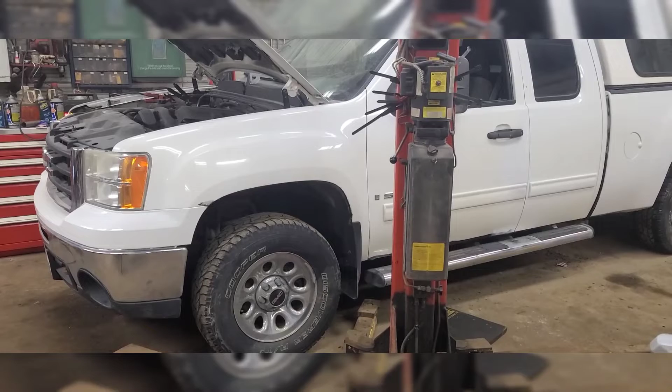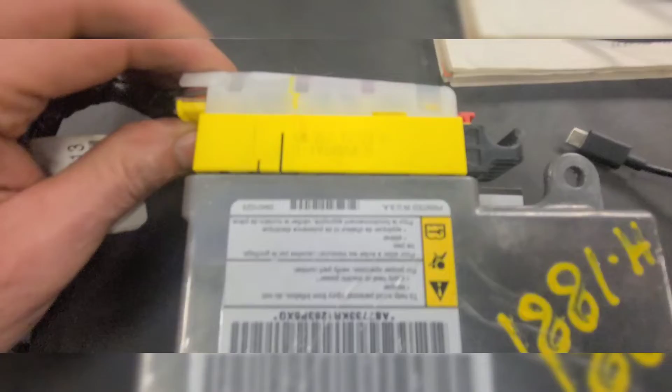Well, good day viewers. Today we're going to try to replace this airbag control module in this 09 GMC Sierra. We've purchased a previously enjoyed one from the salvage yard, and I've got the pigtail connector from it so that I can depin one of the terminals and replace one of the wires, pin 31 I think it was.

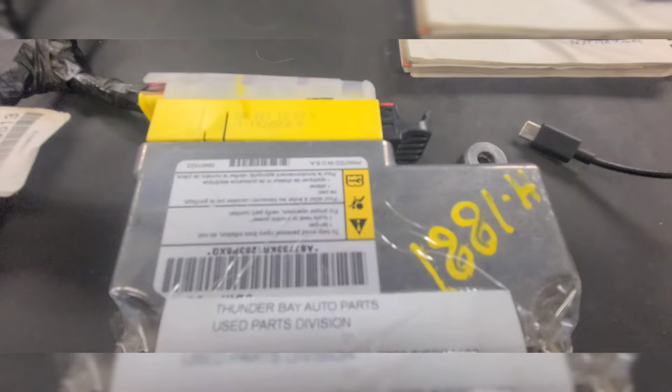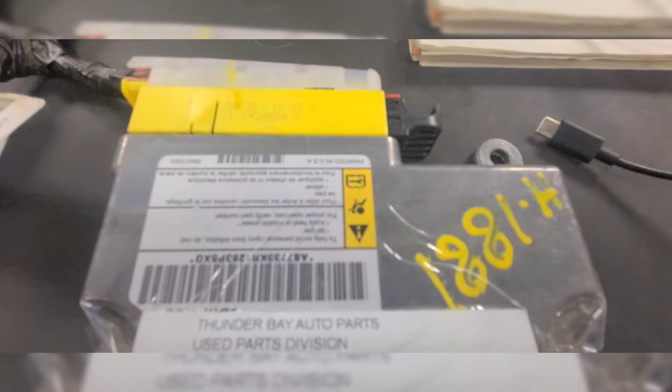But the interesting thing is the customer mentioned that he had a recall done on the airbag for the passenger side, one of the Takata airbags itself was replaced under warranty. So I thought I'd check for any TSBs and recalls on this thing, and I did find one. Let's have a look. So in the service information there are 3 recalls, and interesting, the most recent one that they just did is not listed here.

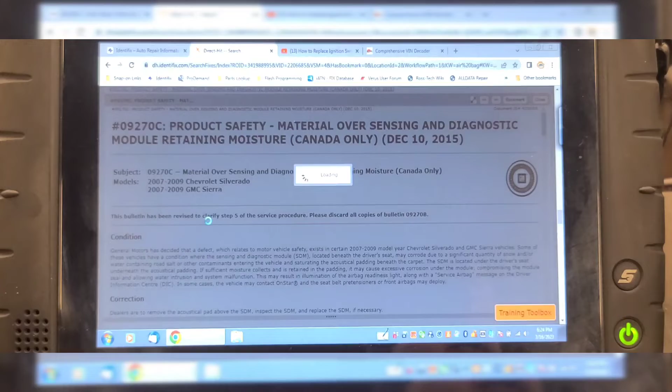But there's a product safety material over sensing and diagnostic module retaining moisture, and it says Canada only, and then there's a US version as well, but only certain states. Let's look at the Canada only one. GM has decided the defect relates to motor vehicle safety exists in 07 to 09 model year Chevrolet Silverado and GMC Sierra vehicles. Some of the vehicles have a condition where the sensing and diagnostic module, that's the airbag module,

located beneath the driver's seat, may corrode due to a significant quantity of snow and or water containing road salt or other contaminants entering the vehicle and saturating the acoustical padding beneath the carpet. The SDM is located under the driver's seat underneath the acoustical padding. If sufficient moisture collects and is retained in the padding, it may cause excessive corrosion under the module, compromising the module seal and allowing water intrusion and system malfunction.

This may result in illumination of the airbag readiness light, along with a service airbag message on the driver's information center. In some cases, the vehicle may contact OnStar and the seatbelt pretensioners or front airbags may deploy. So basically, this recall 09270-C describes the condition that this vehicle has been involved in, but I checked with the dealer today, and the recall was done back in 2009.

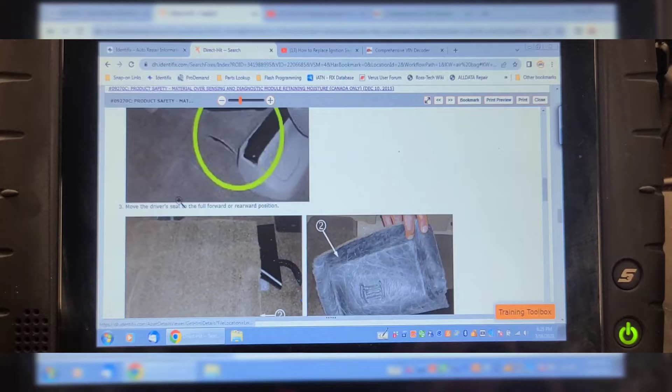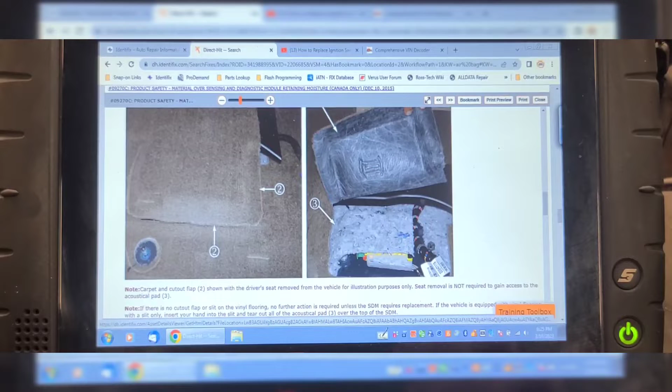And what the recall involves is to remove this sound deadening insulation padding. Just lift the carpet up and pull the padding out from around here. And then it says to inspect the airbag module for corrosion. And if there's corrosion, to replace the module. So it says if the sensing and diagnostic module replacement is not required, proceed to step 8. If it is required, proceed to step 6 and 7.

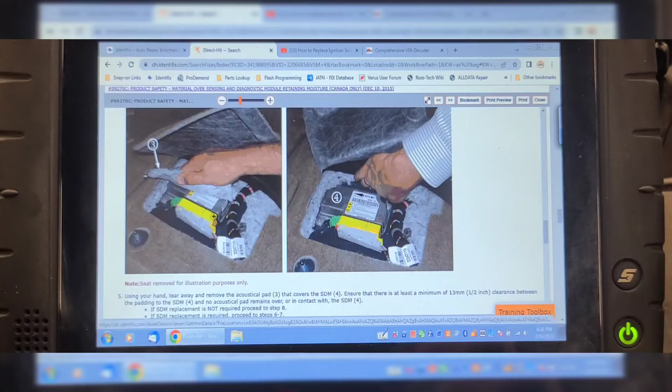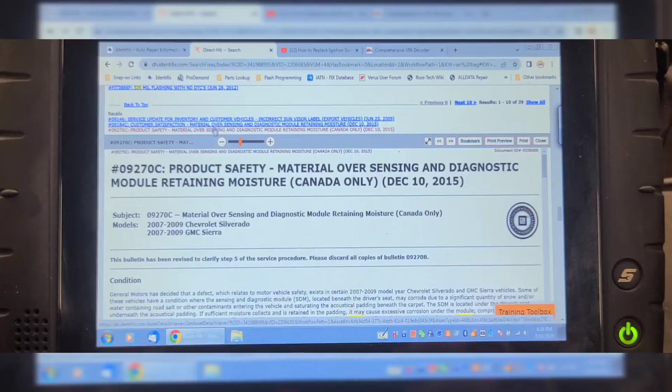Now, GM says once that recall has been performed, and it was done in 2009 according to the service records, they wash their hands of this problem. And that carpeting is missing in there. So that's the Canada version one. But there is another one here that might apply to vehicles in the US. It's basically the same recall.

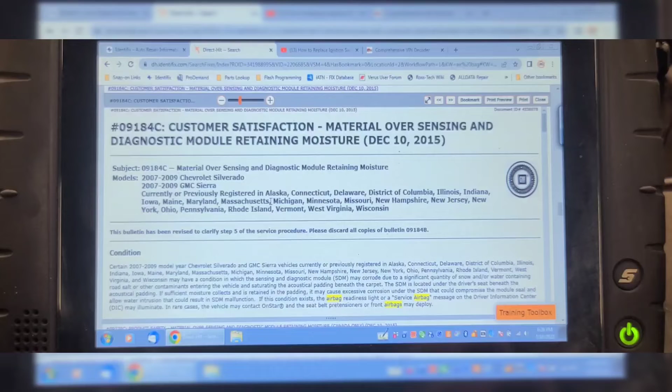It's a different number, 09184C, but it states it only applies to certain states, registered in Alaska, Connecticut, Delaware, District of Columbia, Illinois, Indiana, Iowa, Maine, Maryland, and so on. And basically it's the same thing. Lift the carpet, pull the trim out, pull the padding off, inspect the module for corrosion. If it's corroded, replace it.

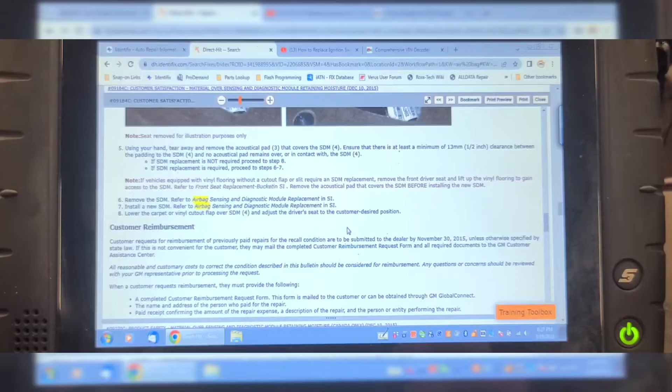But once that recall's been done, and chances are that the original owner got a notice, it would have been done in 2009 or 10. But if you managed to keep this thing long enough and not have that recall done, this customer would have got it fixed under warranty for free. But nevertheless, we're going to go ahead today and try and replace this module and reprogram it if needed. So here's the used airbag connector, and we need to depin this one wire.

So pry this little plastic cover off, it just snaps in there. Untape the harness, use a seam ripper if necessary to cut the tape. I like to use a seam ripper. Now this red plastic piece should just pry out of here, just like so. Pay attention to the orientation. There we go. Now the wire that we need, and you could use any one of them, but I'm going to use the same one that's compromised, is in this corner right here.

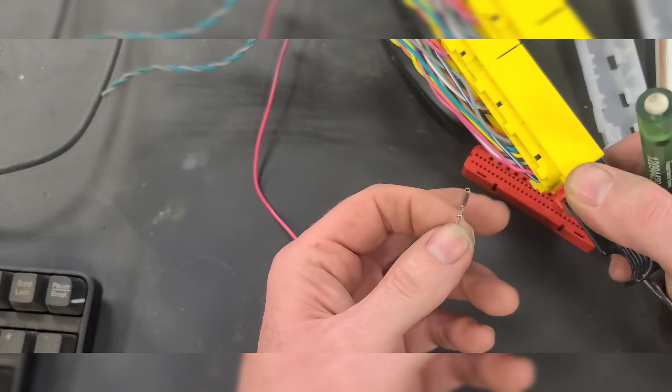And I'm going to use a small pick to try to release the terminal and pull it out. Just pull it right through like that. So now we're going to do the same thing to that module that's in the car. This is key switch power, I believe, or battery power. Usually red wires are hot at all times, so that's probably battery power. So we're going to do the same thing, and then we're going to splice the wire and solder and heat shrink it.

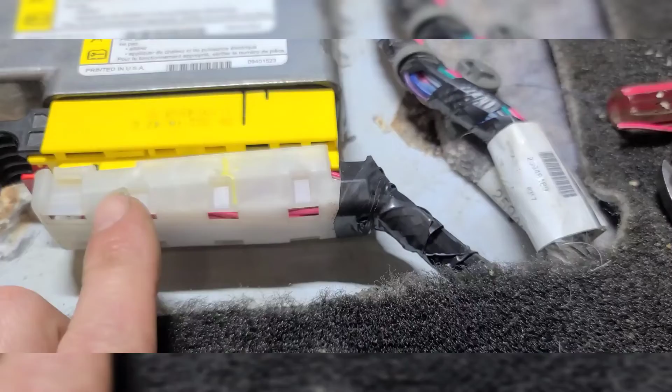So here's a look at the terminal on the existing wire. You can see that it's compromised, but there's another one right beside it, so I'm going to change 2 of them. So we're going to depin them and replace 2 of them. So there's the module reinstalled. I spliced those 2 wires and I put the splice inside here. This clip is broken on here, but it's not going to really hurt anything.

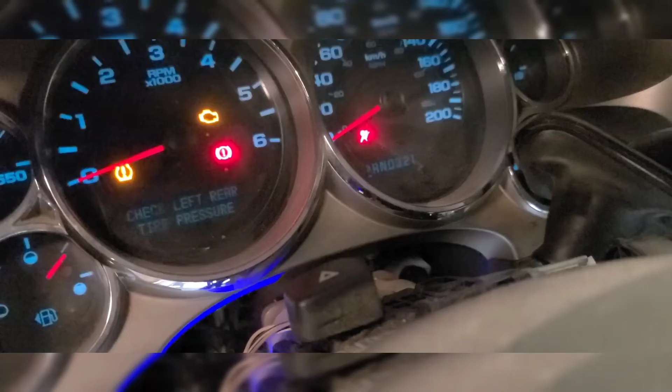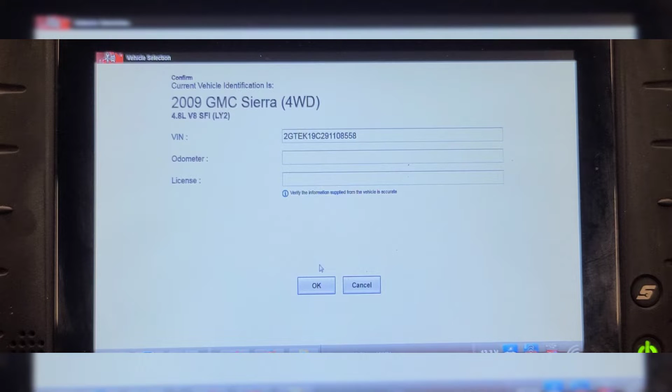The module is latched. I reconnected the battery. So now we're going to do a network scan and see if the module reports any fault codes. So the airbag warning light is on now. Change engine oil message. Service airbag. Let's see what code it's generating. So we've ID'd the vehicle again. Let's do a code scan. Pre-scan.

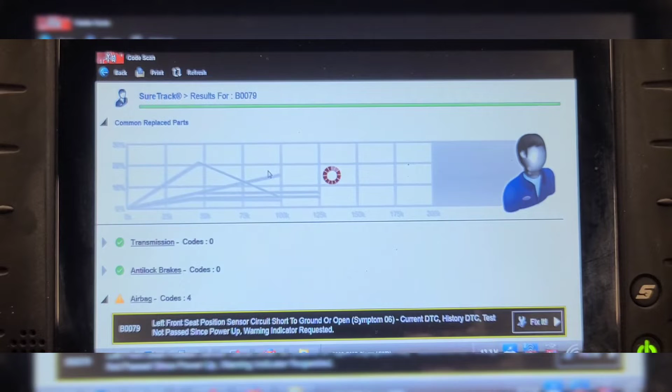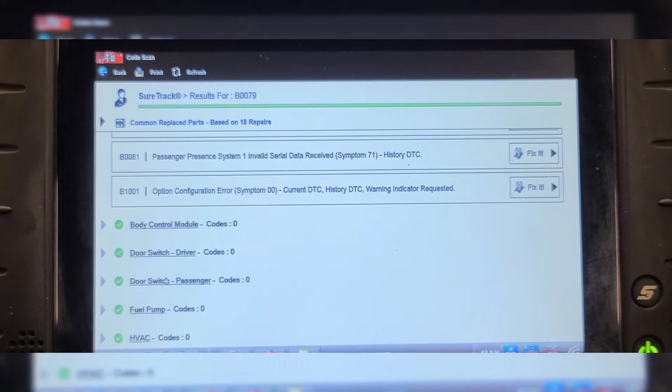Why is my... I got the seat out. Oh, that's the seat position sensor circuit open. I still have the seat out and electrically unplugged from the floor. Right front seat position set. That's right front. Passenger presence system. Of course, it could be tied in. Option configuration error could be because of the airbag module not being calibrated for this VIN. Passenger presence system plausibility failure.

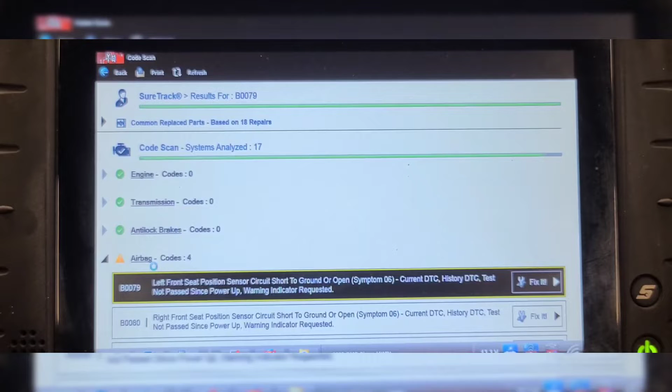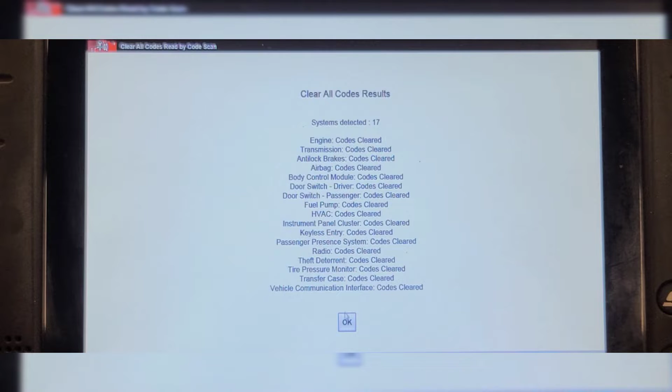Well, let's bolt the seat in and re-clear the codes. So I got the driver's seat bolted back in and reconnected, so that should get rid of the seat track error codes. 17 controllers instead of 6 that we had before. Let's do a code scan one more time and see if we still have the option configuration codes. I'm sure we will. Right front seat position circuit short to ground or open. And option configuration error.

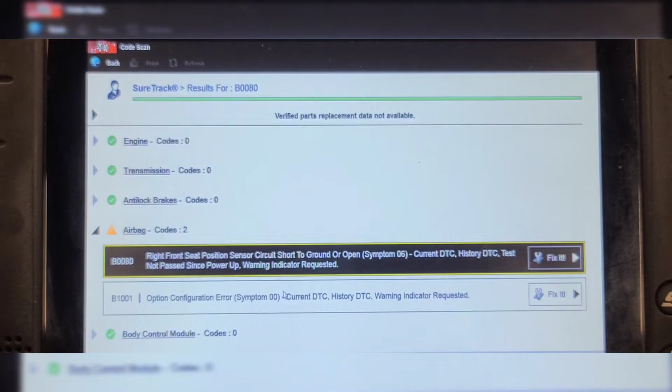Well, I never had the right front seat out. That's passenger side. Option configuration, unless that code is in the right front seat position sensor circuit short to ground. But this B1001 is because of the programming. Let's see if we fix the B1001 code by doing a handshake between the airbag module and the BCM.

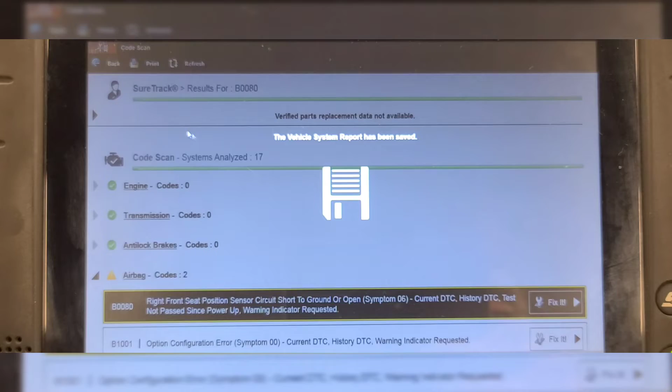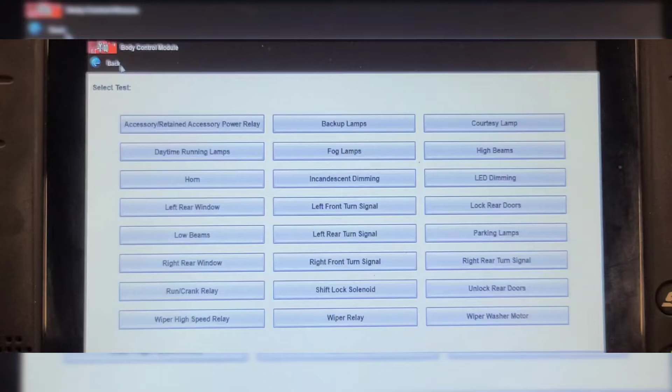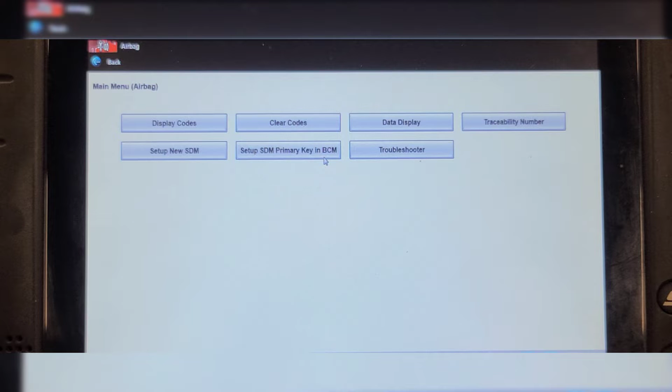Okay, body control module has no code, but let's go into the BCM and functional tests, and no, it's not in here. It used to be in the BCM functional test. Set up new SDM. Well, maybe it's in the airbag module. Set up new SDM. No, that's not what I wanted. Set up SDM primary key in BCM. Let's try that.

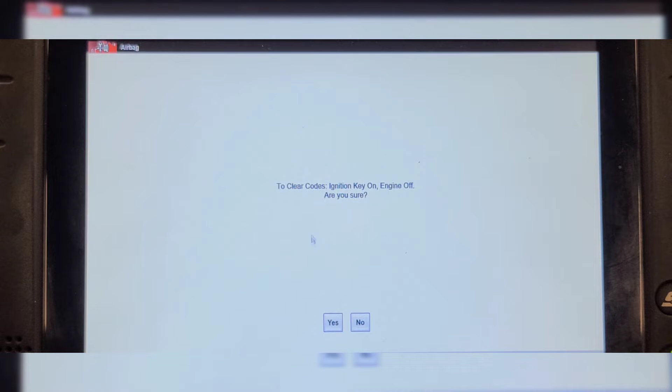Let's see what happens now. Worst case scenario is I got to connect to GM and download programming. Clear codes. Display codes. Current codes. Right front seat position sensor circuit short to ground or open. Well, that could have been there before.

And let's make sure we got no codes in the BCM. Body control module. Display codes. Current codes. No codes. Well, I'll have to talk with the customer to see if he wants me to diagnose the seat position sensor.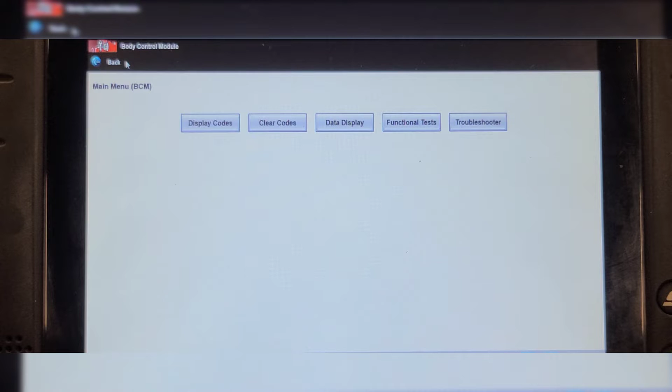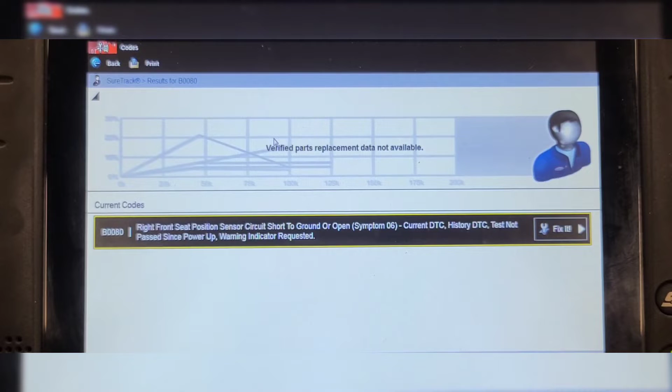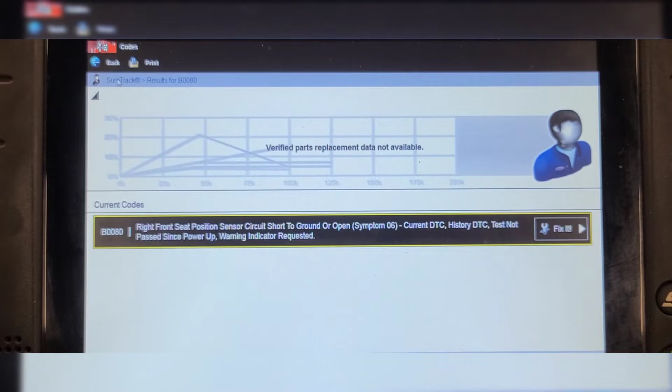Back in the airbag module. Display codes. Current codes. Right front, let's write this down. B0080. Right front seat position sensor circuit short to ground or open. Current DTC. Now that's a problem with the seat track sensor on the right side.

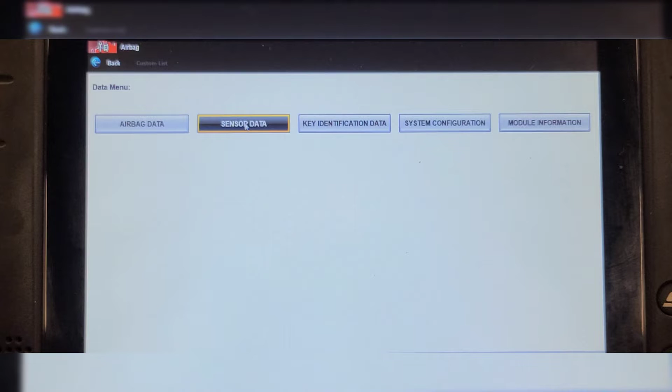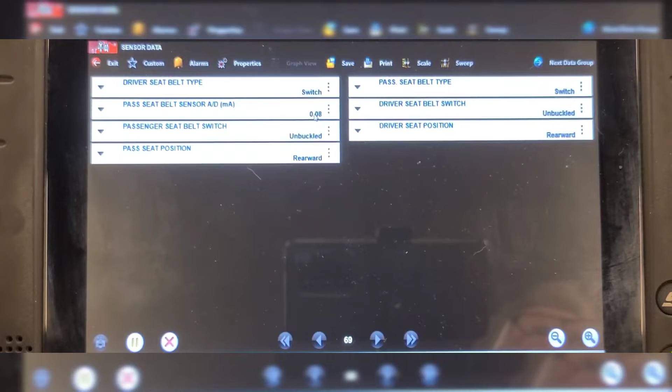Sensor data, system configuration. Driver seatbelt switch, passenger seatbelt type switch, driver seat position rearward, passenger seat position rearward. Passenger seatbelt sensor AD milliamps. That looks normal. How about airbag data? Everything looks normal. Well, I'm going to see if the warning light's still on.

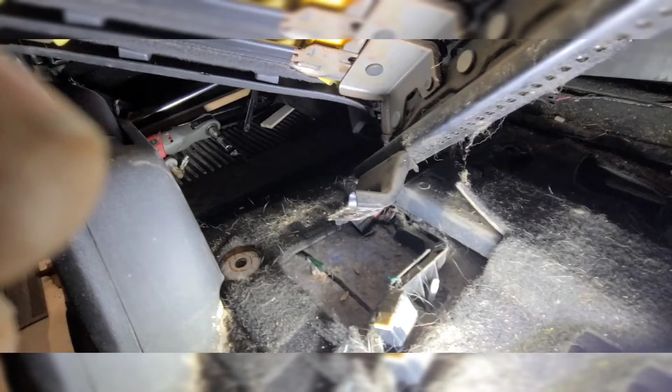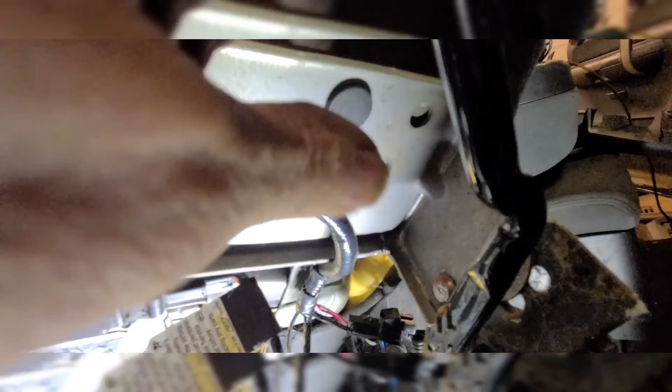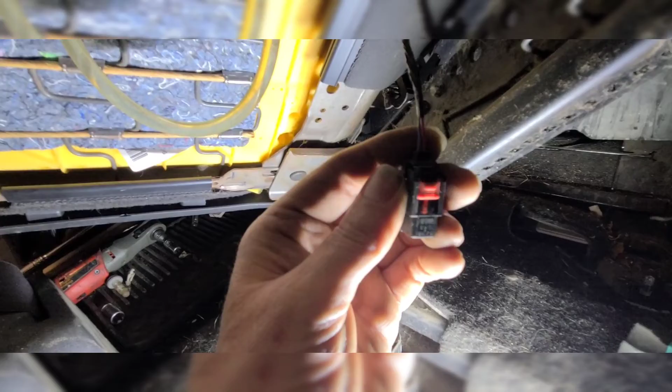So we're under the right front seat, and there's a connector hanging here, and I couldn't for the life of me see where it's supposed to go. It kind of looks important, but it's not. I don't see where it plugs in. Unless it's supposed to plug in up here someplace. But I can't see any seat track sensor, because that's what it was, a code for a seat track sensor. I'm going to look at the wiring diagram and see if these wires match the seat track sensor. But you would think that, I mean, it can't go very far.

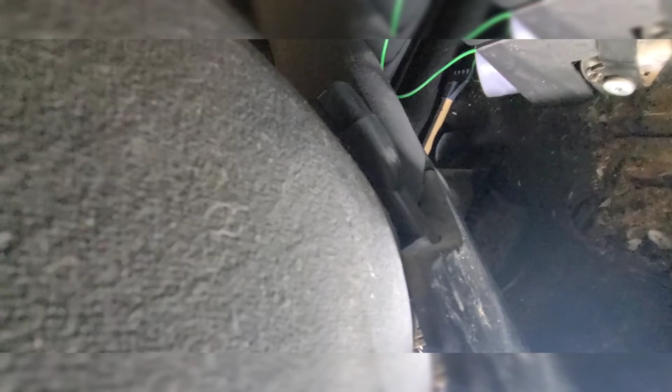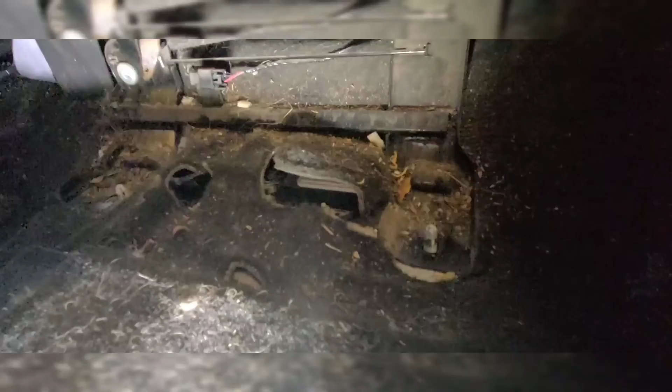There's a connector here and a wiring harness here. Everything appears to be plugged in. Oh, by the way, there's that other splice pack right there. 331 or whatever it was from the first video. All the green wires are network wires. So that one's accessible under the passenger seat. And I think that's a rollover sensor there.

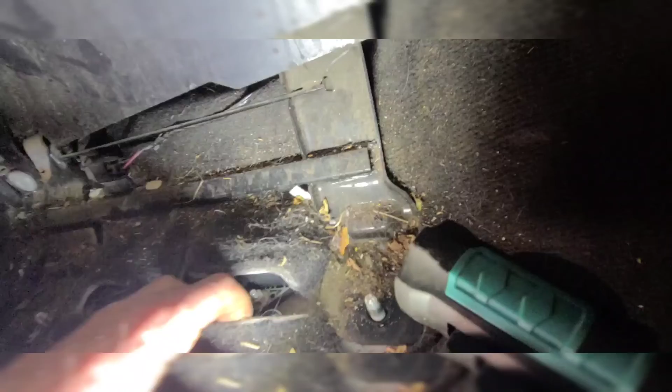See a ground under there. I don't see any place for that connector to plug in, and it would be sitting in this area here. That's a console. Oh well, I'm going to look up the schematic. So here's the troubleshooting steps or circuit description for that

B0080-06. Says the inflatable restraint seat position sensor is used to determine the proximity of a front driver or passenger seat position with respect to the frontal airbag. This seat position sensor interfaces with the sensing and diagnostic module. The state of the seat position sensor allows the SDM to disable stage 2 of the frontal airbag for the front seat that is forward of the forward-rearward position point in the seat track travel.

The SPS is a Hall effect sensor that is mounted on the inboard seat track of the driver and passenger seat. So that 2-wire connector would not be a Hall effect. A Hall effect is typically 3 wires. The seat track includes a metal bracket that shunts the SPS magnetic circuit, creating 2 states of seat position. So if the seat is rear or forward, the shunted state represents a rearward position. The non-shunted state represents a forward position.

The seat position sensor provides 2 current ranges, one range for shunted state and second range for non-shunted state. These 2 states are inputs to the SDM. State 1 shunted being the rearward threshold and state 2 non-shunted being the forward threshold. When the SDM receives input from the SPS, okay, so that 2-wire connector could be for something else that the vehicle doesn't have. Let's look at the schematics and see, passenger presence system 1 of 2.

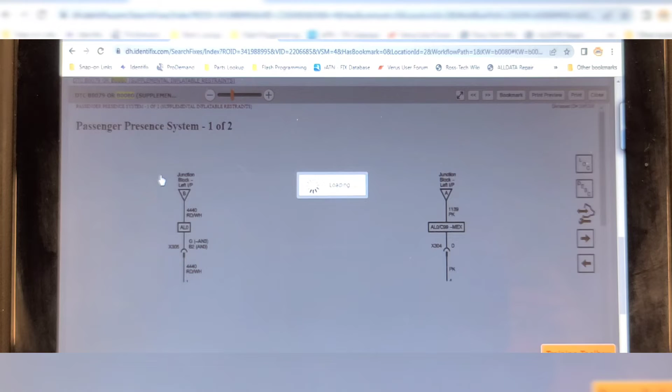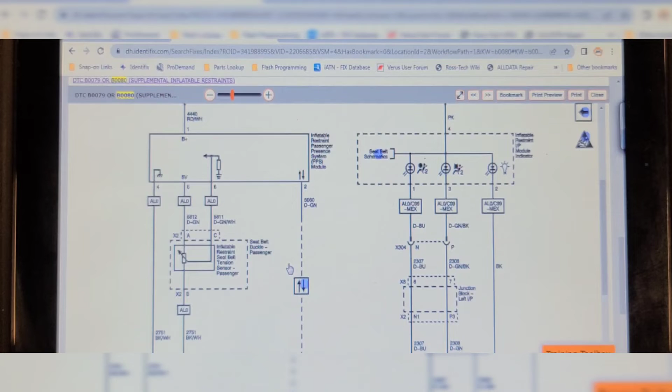Passenger presence system. Inflatable restraint seat belt tension sensor, seat belt tension sensor. That's not what we're talking about. That's seatbelt buckle, passenger side. So that's not it. Okay, where's the next diagram?

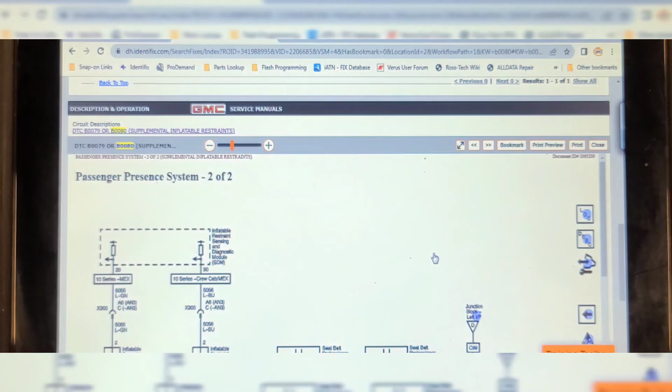Alright, inflatable restraint, seat position, passenger. So there is 3 wires. No, wait a second. Inflatable restraint, seat position sensor, passenger. Light blue and pink. 10 series crew cab, Mexico. 10 series Mexico. Driver's has got light green and pink, and passenger is light blue and pink.

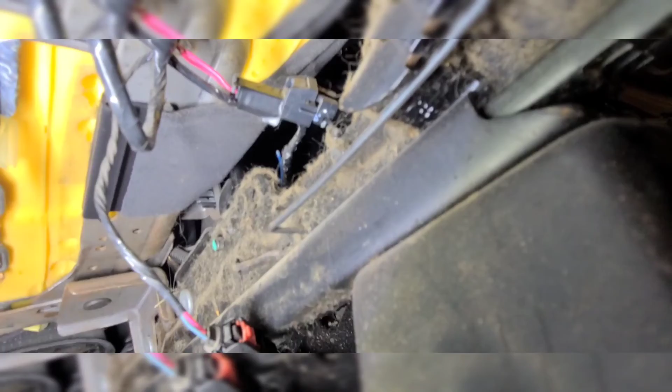So I'm going to look at that sensor. Well, that's definitely light blue and pink. And it's a 2-wire connector, so where the hell does it plug in? It's got to plug into the seat track somewhere. I'm going to take this seat out a little further and see if I can find it. It's got to be in this general vicinity because the wire is only so long, it can't go anywhere. Wow. How could this be so difficult?

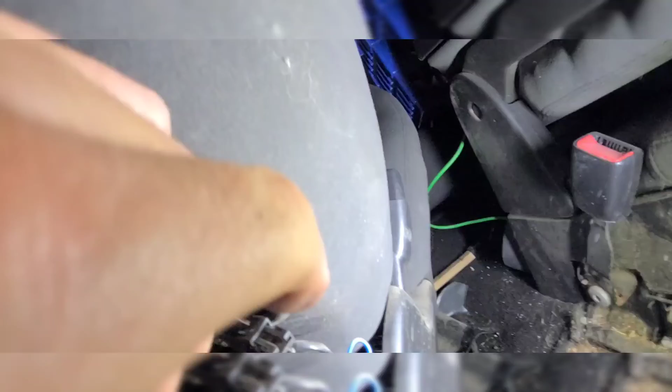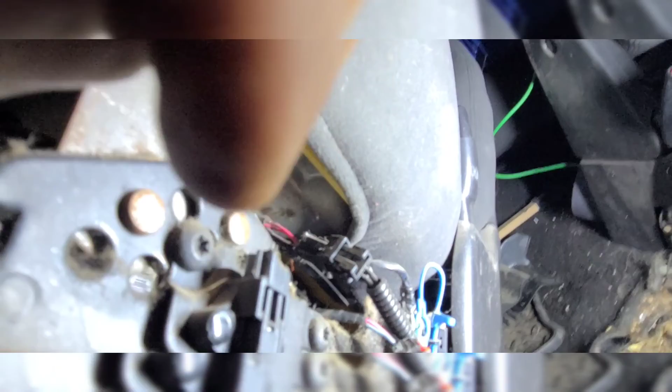Well, mystery solved. There it is there. So that wire comes through here and plugs into that connector right there, which is busted off. I wonder if we can get it still connected temporarily. But that's the seat position sensor. It's probably serviced with changing the seat track. I'm going to see if I can plug it in. So that sensor is broken.

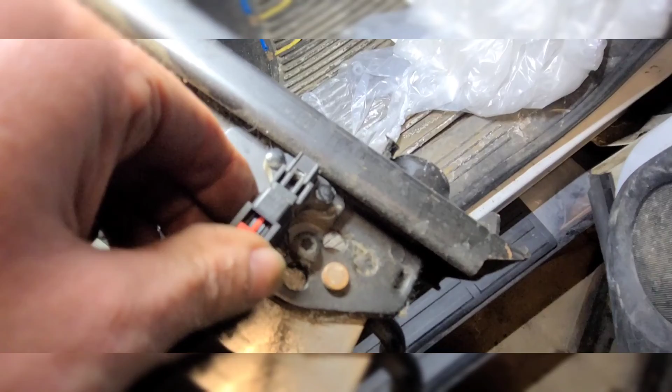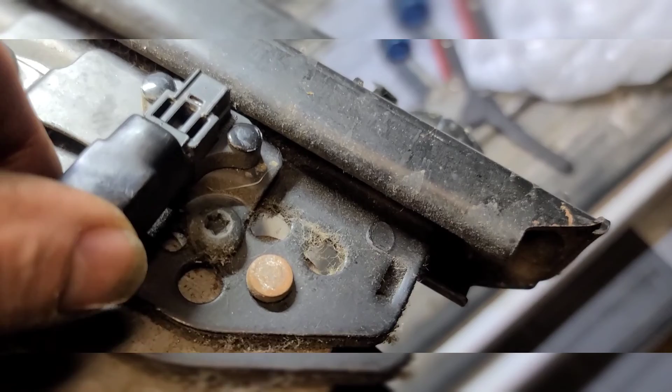I'm going to put a piece of heat shrink over this and try and heat shrink it back together again temporarily, because I'm sure this is serviced by replacing this entire track. So I used a piece of heat shrink tubing over top of the connector and over top of what's left of the sensor to secure it. And that seems pretty secure. It must have got whacked by something beside the seat. There was lots of debris beside the seat.

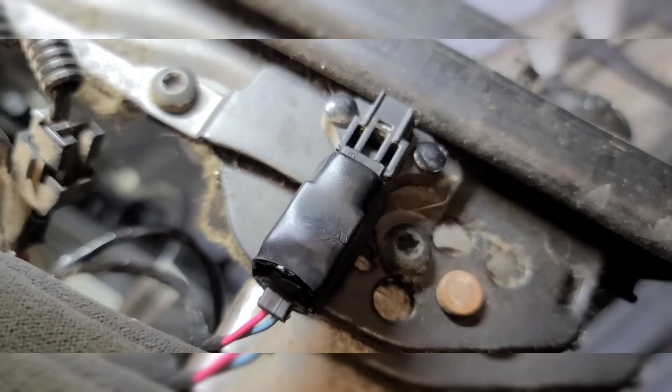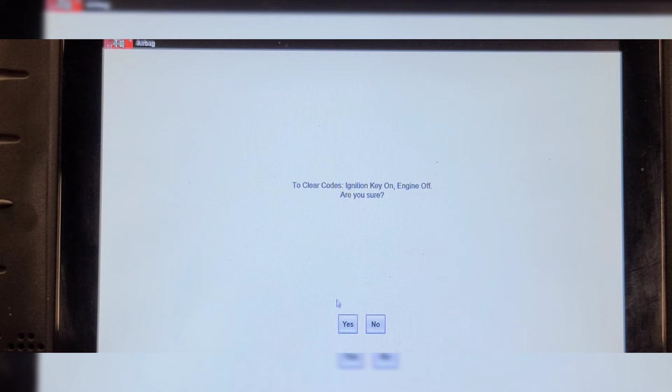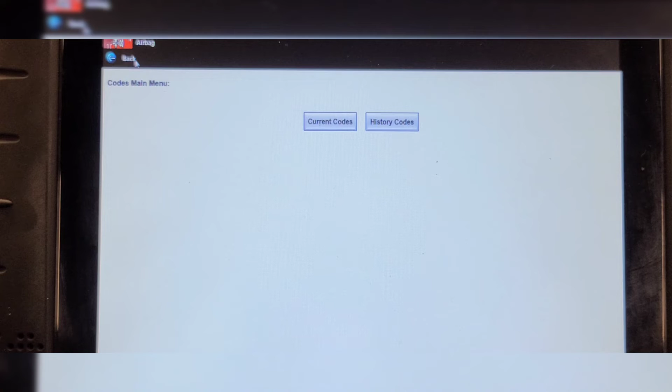So we're going to put this seat back in and bolt it down and see if we can clear that code now. So we got the seat back installed. We're going to clear the codes. Key on, engine off. And then display codes. Current codes. Damn YouTube pop-ups. No codes present. So as long as nobody jams something down beside that seat, it should show that the seat is in a rearward position now.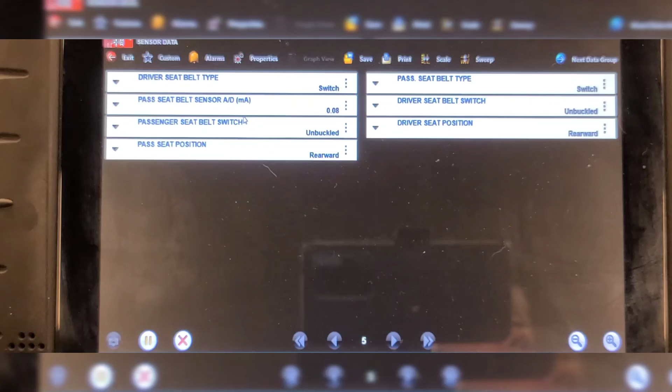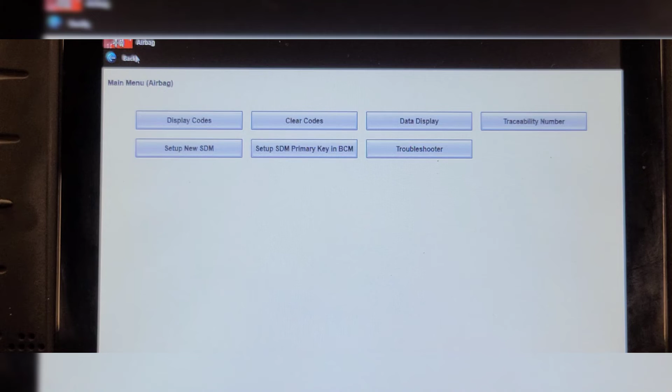Airbag. Run crank, that's the wrong data. Sensor data. Passenger seat belt switch is unbuckled. Driver's seat position is rearward. Passenger seat position is rearward. Good. So now we just got to put the steering column together now and take it for a road test, but I'm sure it's going to be okay.

Well, I know there was codes in the engine control computer. Let's clear all codes out of this now, once and for all.

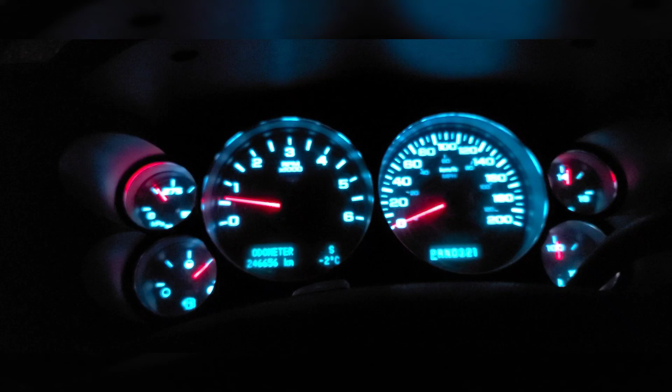I noticed the message to change engine oil soon is on or was on. And according to the sticker, it could use an oil change, but I'll let him look after that. So that's it for now. We'll call this one fixed for now. I'm sure that there's going to be engine control codes in the near future, probably on the next drive cycle, but for now it's running and starting and the airbag system seems to be functional.